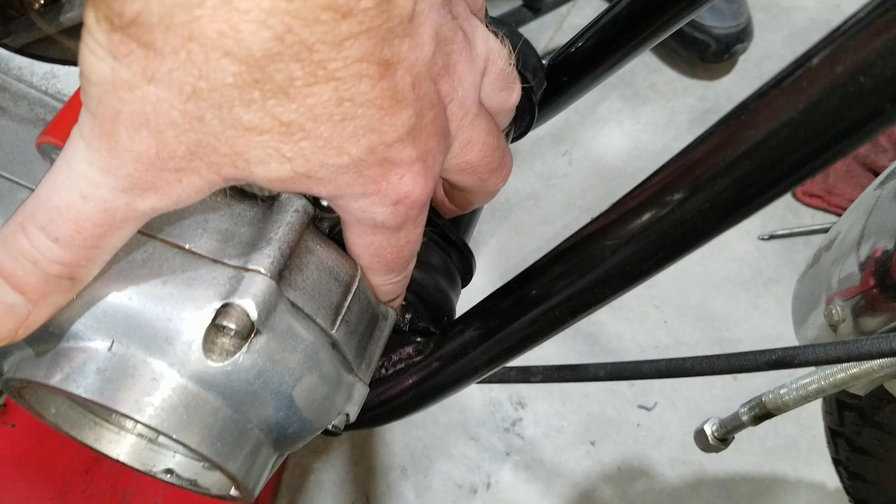Alright, so I just got done setting this down in here. First thing we did was we cradled it into the front motor mount guides, the little parts that are on the frame right there, and saddled the front. And then we installed this first bolt here into the top of the cradle, into the top of the rear motor mount part.

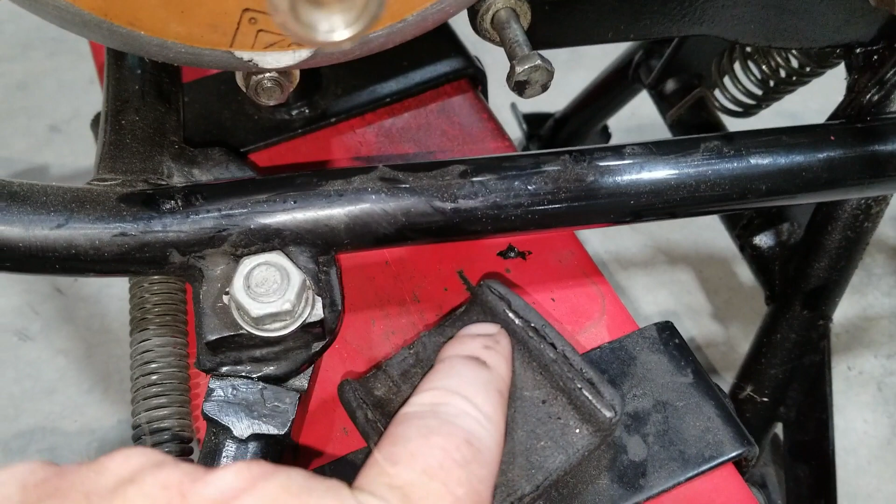So the next step, which we're at right now, is we're putting the bottom bolt in here. To do so, we have it on the center stand, and we're using this little lift vise thing here, and we raised up the motor so it clears the frame here. Otherwise, the head won't clear it. So you have to get it up at least the width of that head right there, and then you can put it in. Basically, we had to raise it an inch. So that's about where we're at.

So now, after we get that all the way in, which we're doing right now, then we'll drop it, like you said, and then we'll line this one up and put the front one in. Starting to lower this lift here. Wait a minute, I gotta take the center stand off. Yeah, because otherwise it won't do nothing. There you go.

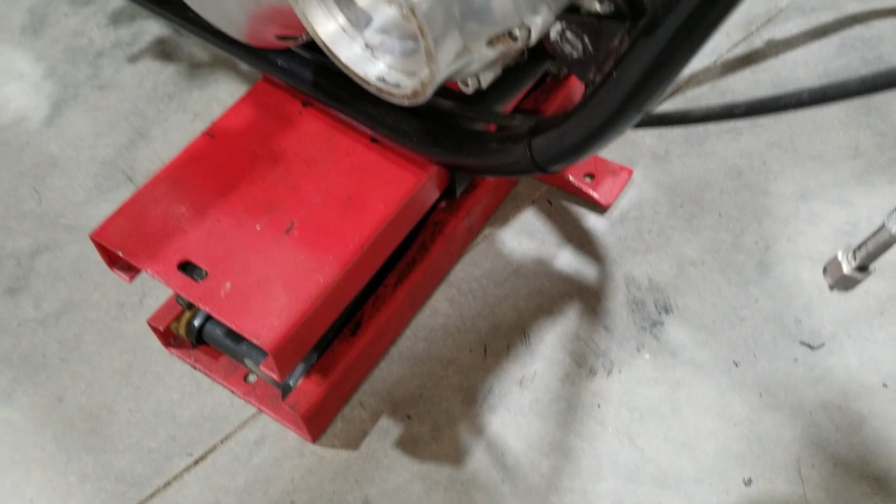You get the alignment pin in there, then I'll be ready to put the bolt in. The bolt comes in from this side. Yep, go ahead. Okay. Alright, so I mentioned before in part one when we were taking this engine out, we talked about the adjustable front motor mount. Unlike the original one, which used shims to get the right clearance, this actually has an adjuster here at the end.

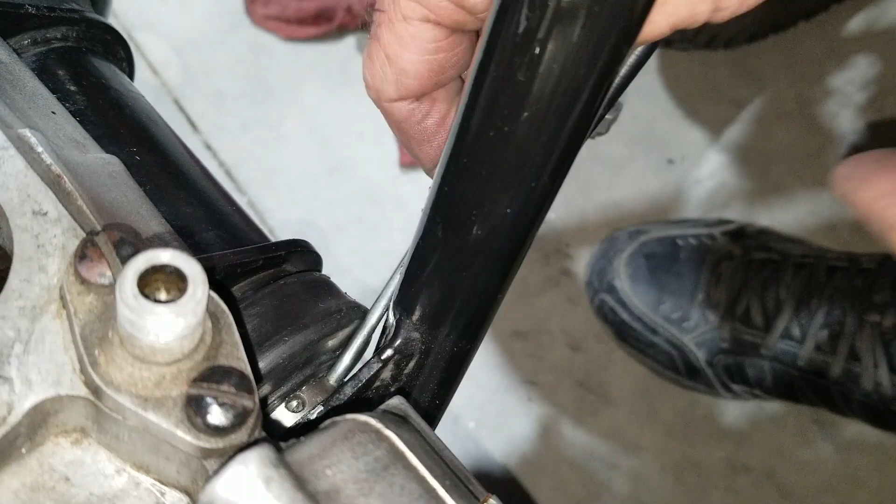And so we use this bar, a special tool here. And we want to get in one of them holes there. I can see. Okay. Now to adjust it, I gotta see. I can't use your camera. We gotta go 1.5 holes. And then all we do is 1.5 holes from tight. From tight. Okay, I'll do it again.

Okay. See where the hole is? Yep. Now I'm going to run this hole up there. Dang it. Where it was. There's one. Now half a hole is in between here, so I'm going to bring it up to about here. The frame gets in the way. There. That's about 1.5 right there. Yep. From tight. Okay.

Then we torque it down to 30 foot-pounds on the bolt. We do the adjustment first, then we torque it. Yep. So with that being tightened a hole and a half from tight, when we torque this down, it should give us our 6 to 10 thousandths in clearance, or free play, right? Yep. Alright, so we're gonna go ahead and torque it down now.

We're torquing the top rear motor mount. This one was 25 foot-pounds. We should get there someday. Yeah, and we got to torque the head of the bolt because we can't get access to the nut from this side. So here we go. Next one's a different wrench. So can you get to the other one? With a long extension I can get to the nut on this one, right through there.

All right, so we got to torque the front motor mount here to the motor. And we just got done doing the back one. There we are. Oops, let me get back on it. You want to check it. Okay. And then the bottom one. Got it? Yep. You can't get on it with the box end. Maybe this one I can. Surely not the top one. There we go. Yeah, I'm on the bottom with the box end.

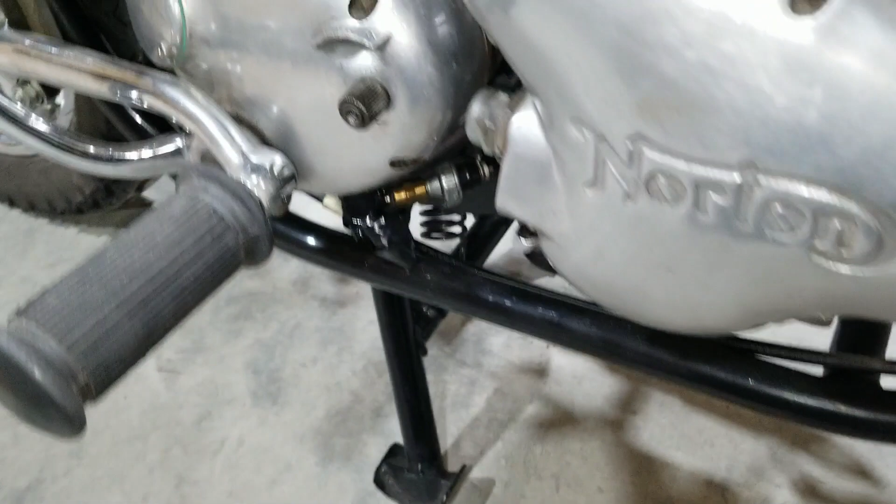You want to check that one? I can. Yeah, you check the other one. So there we go. Yeah, so the other two we tightened up was this one through here. I ran it through with this side and tightened it down, 25 foot-pounds, and then the bottom one down here. Same thing. There we go. We're ready for the next couple steps here.

Alright, so for the next step, we're going to install the primary side so we can lock the engine when we go to put the top end all on. Then we're going to run the oil lines and stuff, and then pretty much almost done. I mean, it's going to go kind of together quick, hopefully, here.

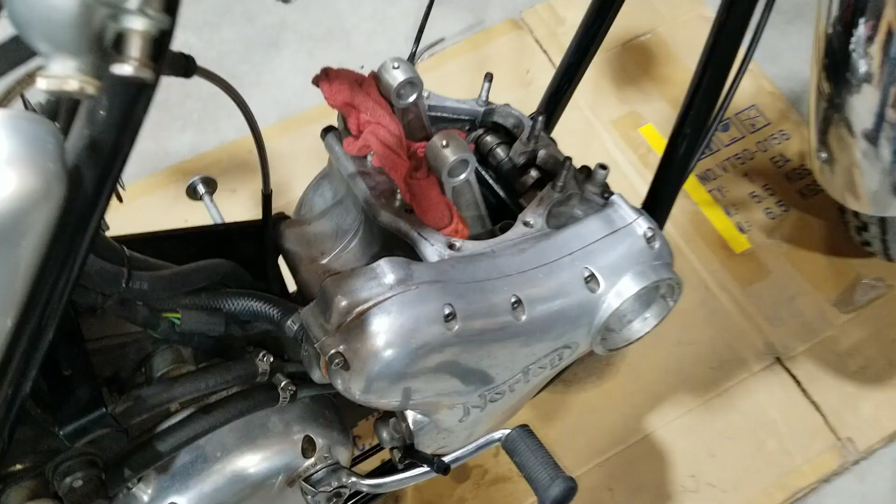Alright, so we got the oil lines hooked up here just now, and then we also put a little banjo on here on the oil feed. We're going to work on priming the crank assembly. We don't want that thing to be empty.

Okay, so you turn your crank to where the cheeks are, like there's a spot here, but that's what I go by. It's at 90 degrees because the holes that are drilled through there for oiling are at, when the crank's at 90 degrees, the journals are at 90 degrees, and these are at 90 degrees to that, so straight up. In theory, right now, through that little hole, I could probably slide a small wire right into the crank on each one.

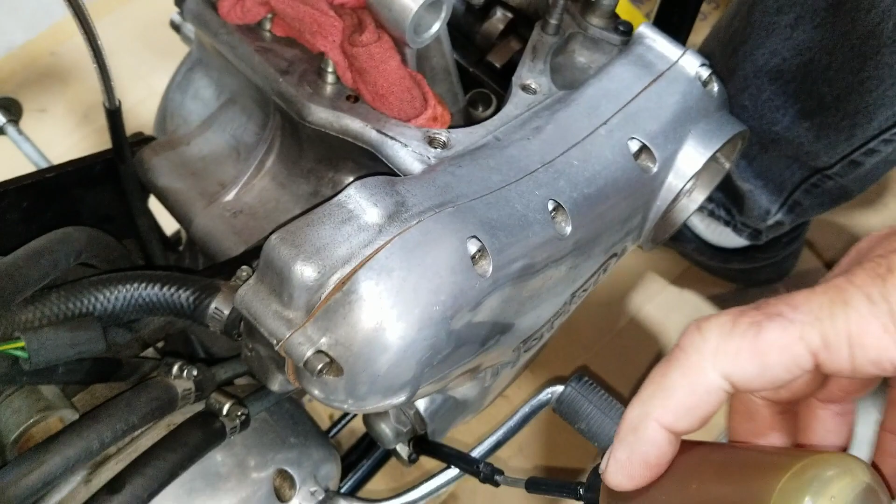So what'll happen then is I'll take this oil bottle here, which I got clean oil in. I'll put this in here, and now I will start to squeeze oil down through them. Eventually what we're going to see is it'll start to bubble and oil will start coming out. Now we put oil in it already before we put the timing cover on it. There, did you see a bubble? It's pushing air out right now.

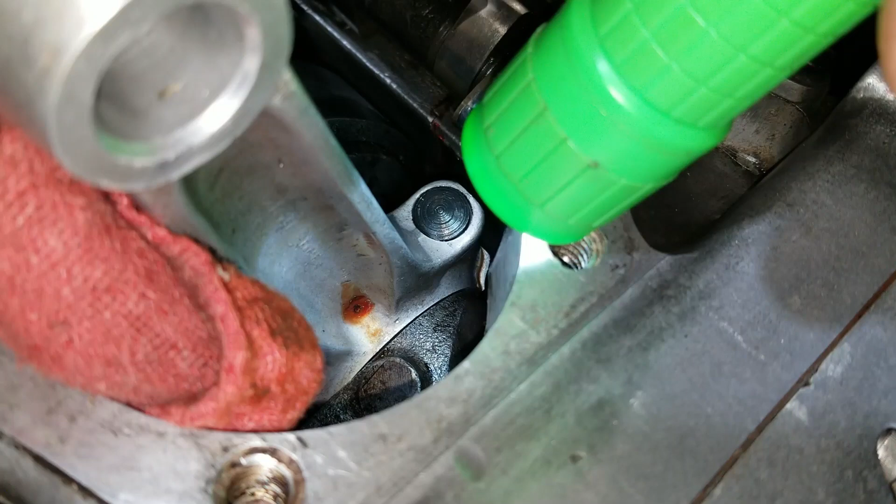And I'll keep doing this until oil just actually runs out of both sides. All I'm doing is putting pressure on the oil bottle right now, and it's slowly expelling the air. It's got a long travel it's got to take from where I'm at to here. But eventually it's going to get full.

To fill it, it holds somewhere around 4 ounces of oil. The crank does. So you want it full, or thereabouts. Or at least I want to start with it full. Yeah, we don't want it dry. It might drain out if we turn the crank to the bottom or something like that later.

Yeah, so we'll finish this up right here until it starts pouring out. There's some more bubbles. It's pretty much almost there. See the bubbles? Can you see them? Yeah, I can see them on the screen here. Yeah, anyway, that's the whole purpose of what we're doing right now. Just priming it so it's not a dry start.

Yep. I'm on the left side of the bike now. I'm going to check to see if there's any coming out. You go ahead and... Yeah, I am squeezing. Yeah, you are. I can only squeeze so much at a time. I can't pump it in. Right.

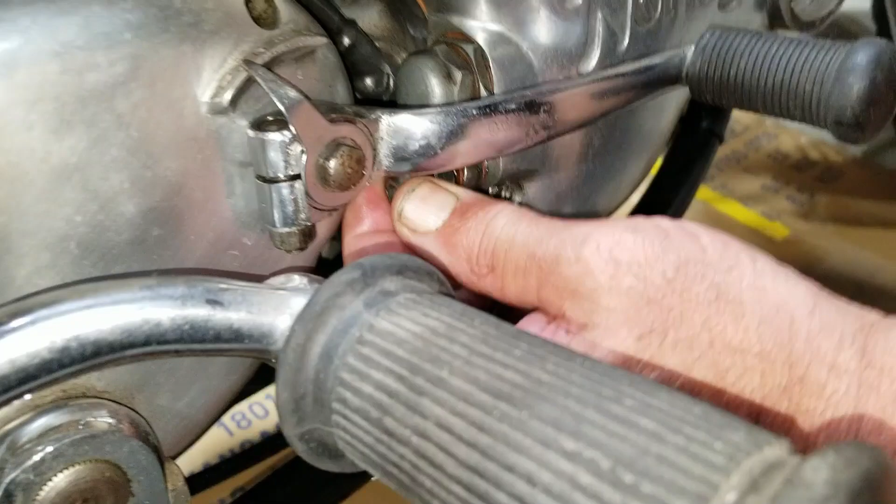Alright, now we took off our little improvised feed tube thing. And then we're putting on the actual line and pressure switch and stuff there. Yeah, we run an oil pressure gauge with a sender unit. Come on now. There it goes. Well, I guess that's not going to cooperate that much with me. I'll just turn it in a little bit more. Yeah, then we'll tighten up when we're ready. Okay. It's going to get pretty boring.

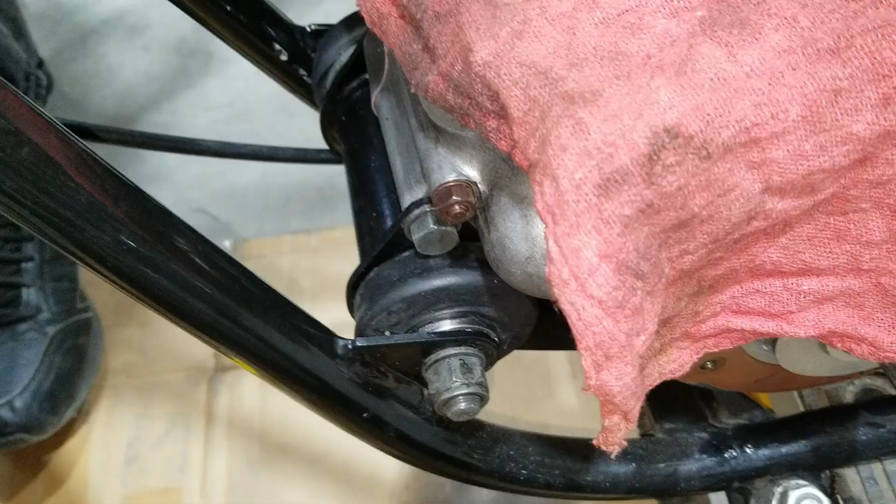Alright, so we're getting ready to put the primary together, but we're going to revisit the front motor mount. This is actually an adjustable front motor mount like we said before, but this is actually a Mark III item, and we just put it on this Mark II. It's a better setup than the standard shims and all that stuff, like the Mark II would have had originally, so that's why we went with the Mark III style front motor mount.

So this is what one looks like. It's buried there and you can't see it very well, but here's what the adjusters look like on the side, and so on. So anyway, why I'm talking about this is we need to go in there and actually use a feeler gauge and check it just to make sure that it's got the right clearance. So we're going to do that real quick here, and then we'll move on to doing the primary.

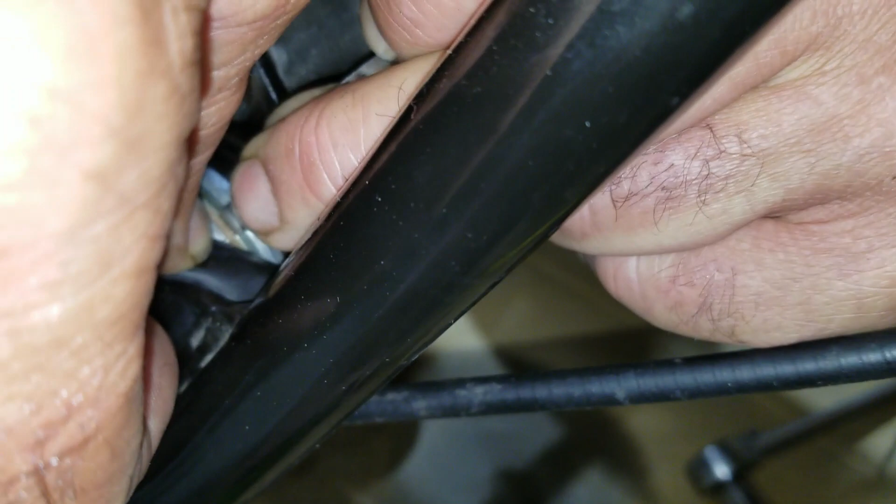Alright, so right now I'm kind of prying the motor away from the frame here with this rubber hammer, and that's going to relieve any sort of pressure on there. And I can't get a 6 in there. So we're going to have to move this. We're going to have to loosen it a little bit.

If you get it too loose, the bike will feel like it's wobbly, because the rear wheel and the motor move, and it'll feel like it's loose or something. It's a strange feeling. Okay. Let's see where I'm at here. There it is.

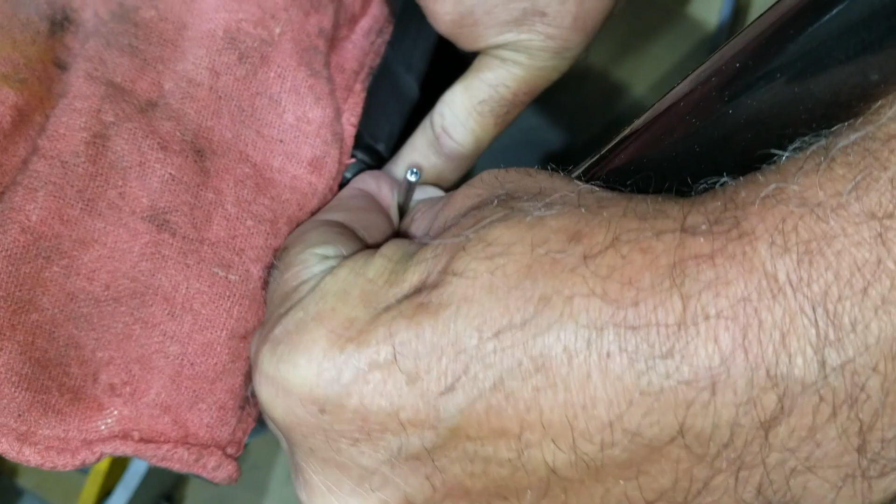Okay. Alright, you got it moved a little bit? Yeah, now we're going to have to snug it up. Okay. Because you got to test it after it's tight. Okay. Hold on. Yeah, there we go. Okay. Now we're going to test it again.

I could barely get a 6 to start. We got to go more. Okay. All right, so we got it to where an 8 fits in between those two pieces right there. See that? So that's where we want it to be. Now we're ready to torque this back down. It should be good.

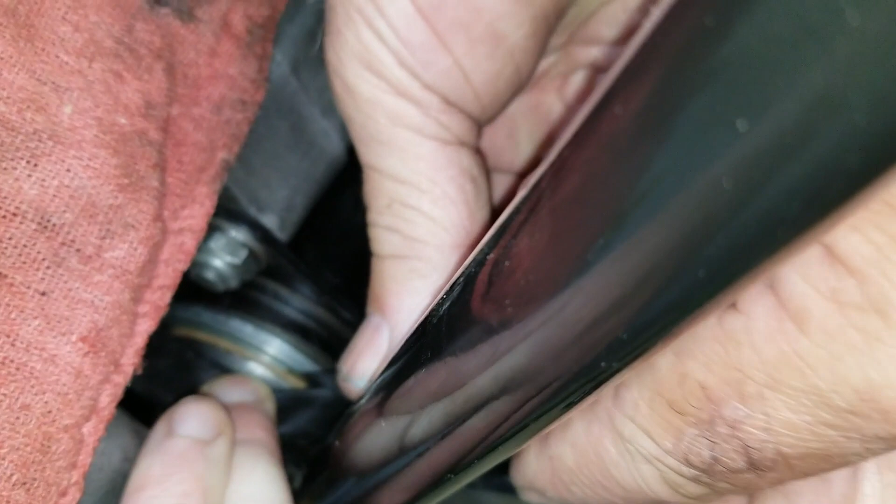There we go. We got it torqued, and now we're just going to double check it real quick. Yeah, it fits. All right. One washer. All right. So while working on this primary here, you want to make sure that you have it aligned properly. It needs to be flush with the motor.

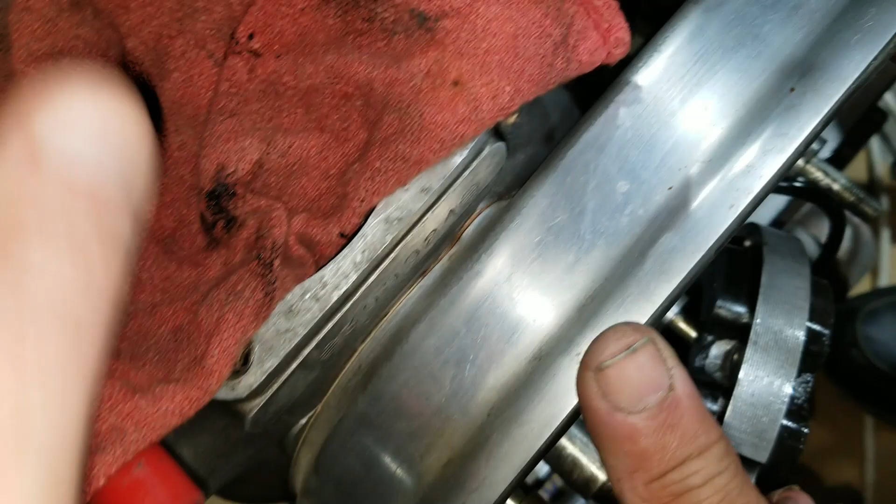When the motor is all tight and in the frame and on the cradle, the transmission is tight on the cradle. We want this solid tight. And these washers back here should not move. There's a set of washers right down there. Okay, let me see that. Yeah. So that's what gives you your position on it. Helps you achieve this being flat with the motor.

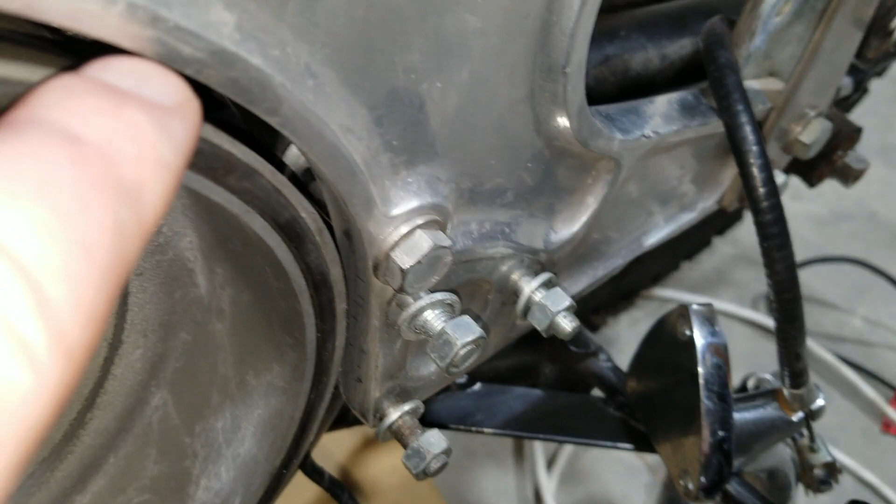Because you don't want this primary cover to be cockeyed or loose or something. Because this whole unit, the motor, transmission, rear wheel, it's all one unit, and it's isolastic, and it moves around. And the other important thing is to make sure you have a gap here, going all the way around, because it wiggles, and you don't want this rubbing on anything. So we're good. It's pretty much just the way it was when we took it apart.

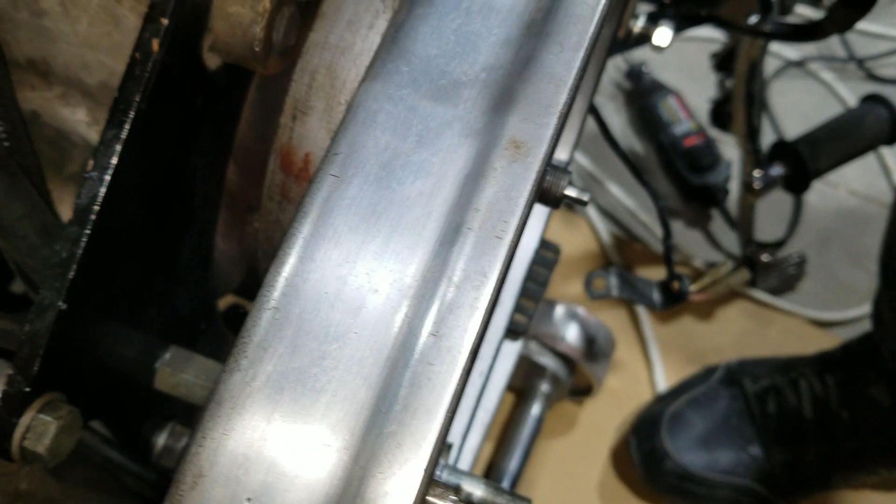We did add a washer though down in there. Yeah, we added one washer about this thick. Because the other thing is there's the swing arm. You can hit the primary back there. You can't see it from here, I don't think so anyway. All right, so here's the swing arm, and this is the part that can rub on the inside of the primary.

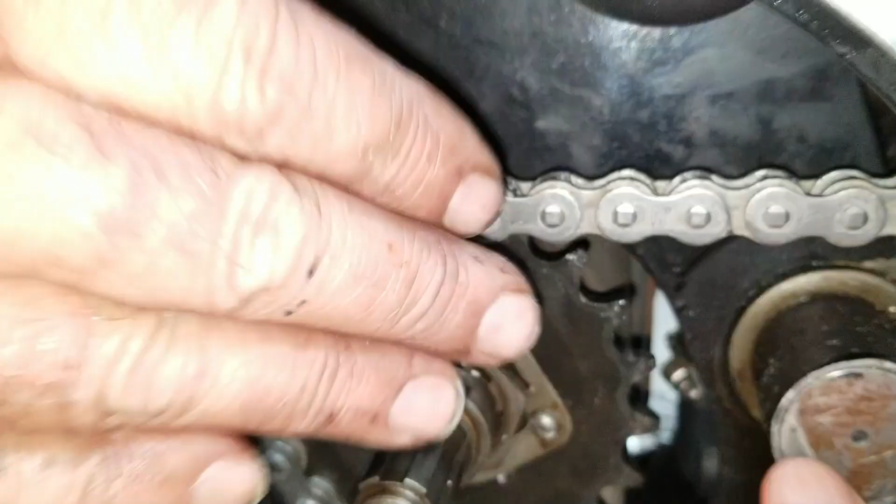And maybe at one time this actually was, because there's kind of like a wear spot here. And here. Oh yeah, and the primary too. Right there. So I don't think that's where we got our noise from, but anyway. That's also why we added a washer here. One little thin washer can make a big difference if it's not lined up right. Yep, that's it right there. Extra washer. Now we're just going to put some sealant on this just to help seal it, I guess.

Alright, so we replaced the gasket just for good measure, and we used 518 to adhere it to the primary. Right now I'm going to just pop it on there. There it goes. Alright, cool. Then we're going to put the special bolts and lock tab pieces in there.

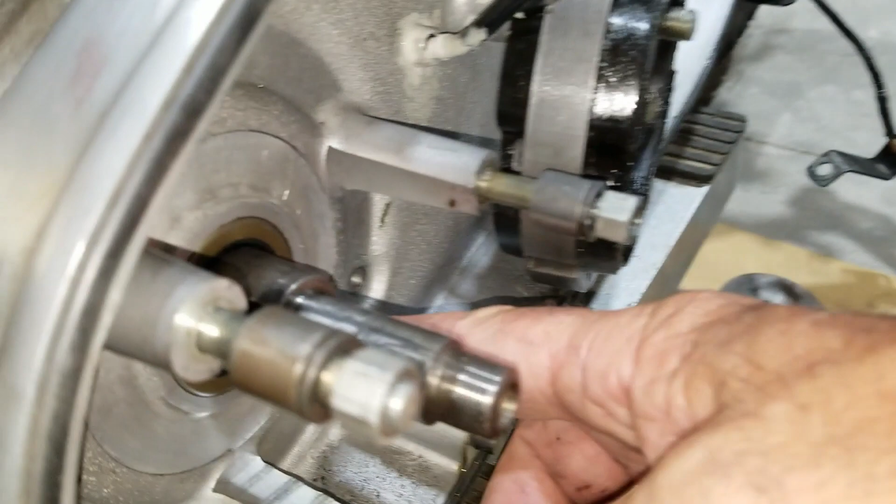Okay, there's two little bumps here. See that one? Yep. And this one, and then there's the hole. Them two little bumps got to be on this. Then you bend that over the head. So I gotta put this down in here. Start the bolt. Not worried about it yet. It's kind of falling in place anyway. Yeah, it kind of does. But it could be 180 off if you're not careful.

Yeah, we did use a little bit of sealant on there because those holes are through to the motor. You can see it's in there. There we go. We'll put the rest of them in. There's two other ones right there, and at the top, of course. And we'll tighten them down to 100 inch-pounds. See that in a minute here. Okay.

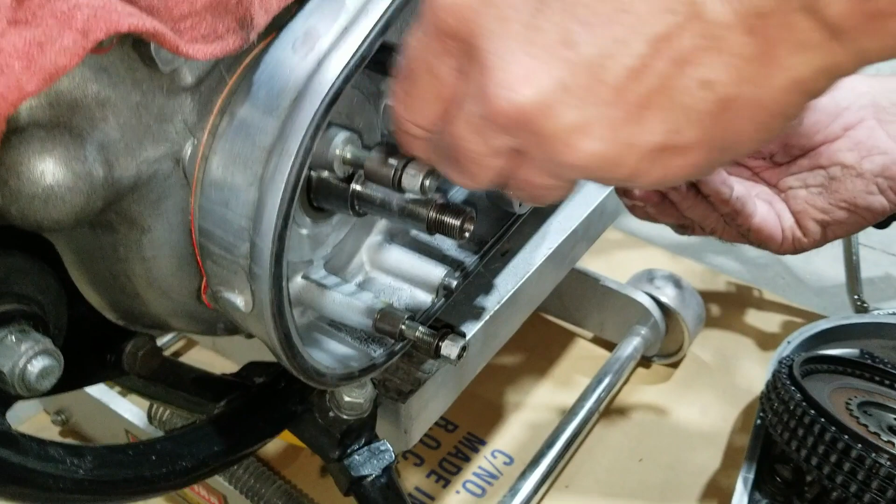Work my way around. That way it goes on evenly. Yeah. For any weird reason it wouldn't. And then, yeah, making sure that I can just barely turn that washer, so we're just looking perfect. Cool.

That means when you tighten this up, it ain't gonna push that way in. Yeah, then cause a weird non-straightness, and then eventually break or crack down the road because of the stress that's on something, right? Yep.

Here we go. Now we're going to bend over the tabs. You ready? Yeah, we're working on folding them over a little bit. And you can get in here with pliers and bend them right up nice. And it locks it. Just got to get behind it and start it to bow out. There we go. They're on.

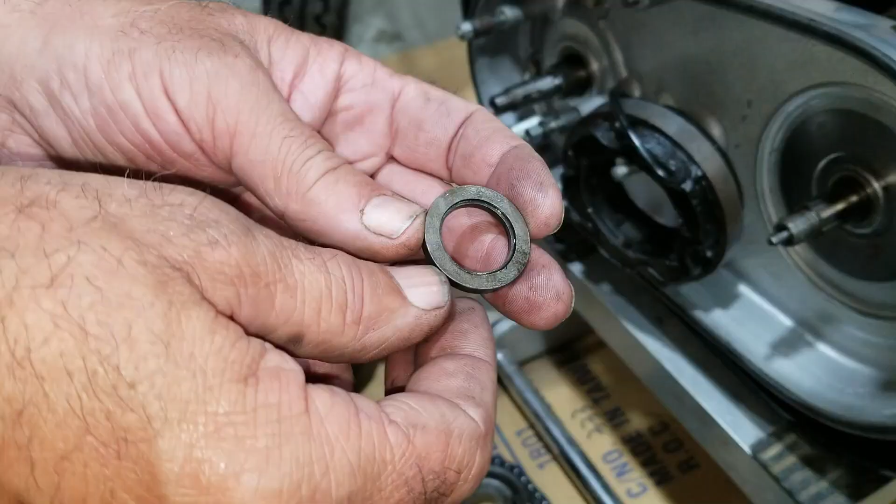All right, we're getting ready to put the components back together in this primary. So, okay, there's a thick washer with a groove, and the groove is to make sure that this little snap ring that's on there doesn't pop off. So that's got to go over top of it like that.

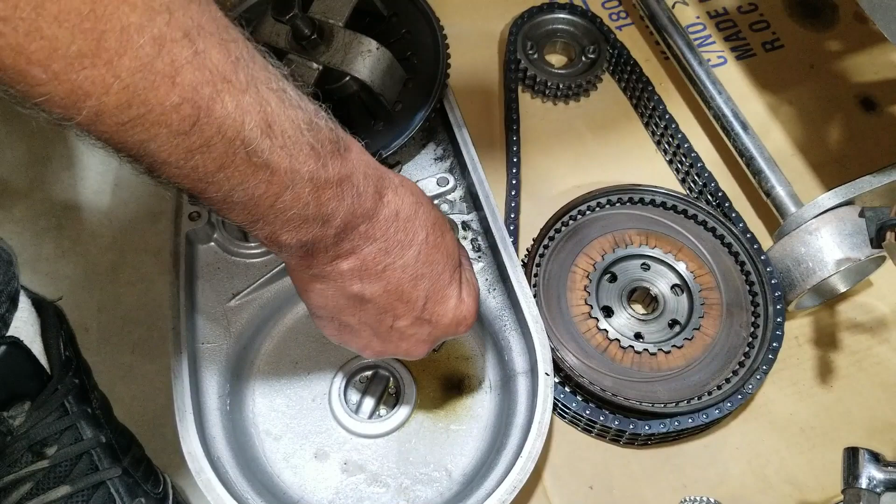Now there's also some shims that go with that. So this one must have had 3 shims. Or 1 shim. I don't think this one goes to that. No, this goes up here. All right. That's the lock washer. It goes to there.

The big key goes on in the back part, of course, only when it fits in. That holds the front sprocket on, yeah, or engages the front sprocket. Okay, so got to put this on as a set.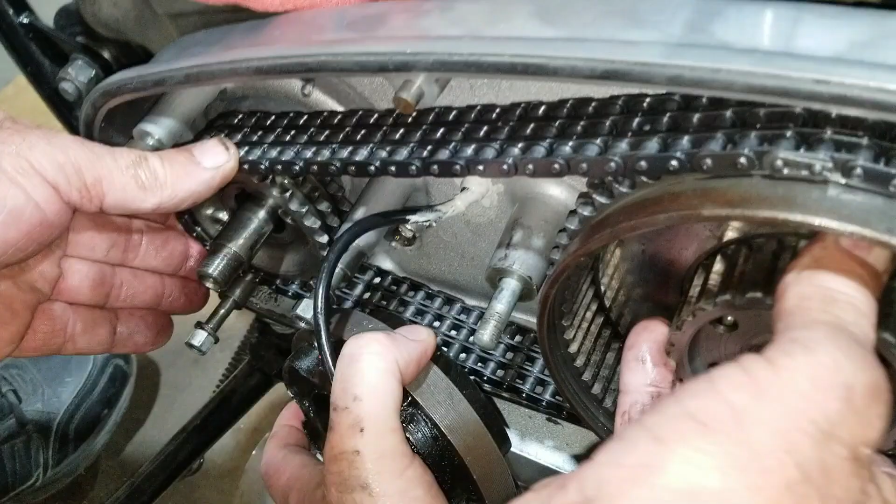Oh, wait a minute. It's not even on it. Yeah, that'll help. That'll help a little bit. Yeah, that should help a lot. I thought it felt kind of. There it is. Okay. Oh, there we go. Put the damn thing in gear, huh? I didn't think that transmission was that tight.

You gotta go forward more, no? Yeah, well, for some reason, it feels like it's tight. We got it pushed on there. Again, it's a little bit tight here. We're gonna have to adjust the transmission a little bit. We're supposed to have 3/8 of free play. It's not that, obviously, right now. So 3/8 to half inch, something like that. So we'll work on going the rest of the way here, and then we'll work on adjusting the transmission.

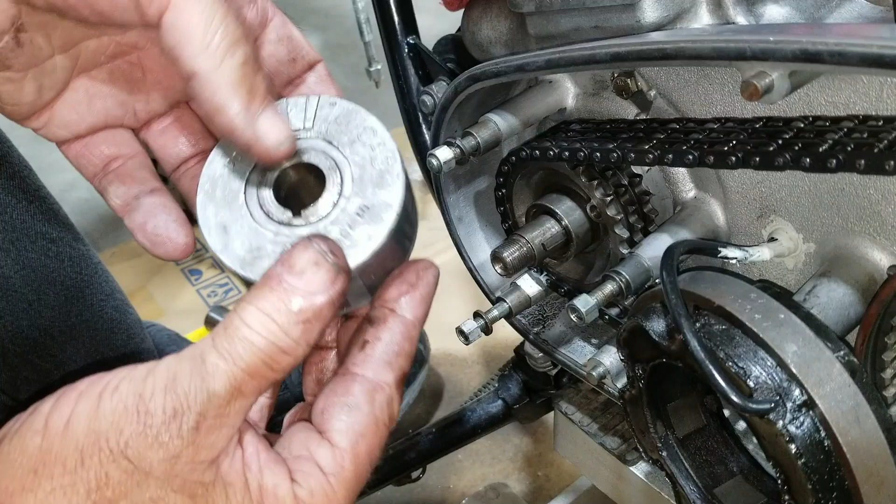That's cupped because of how the magnet goes in there. Oh. So you're saying cupped? Oh yeah, it's counterbored or whatever. The spacer, okay. Shims go to the rear. Like that. That's so that you can put this in here like this. If it was flat, it wouldn't go in all the way. Like that.

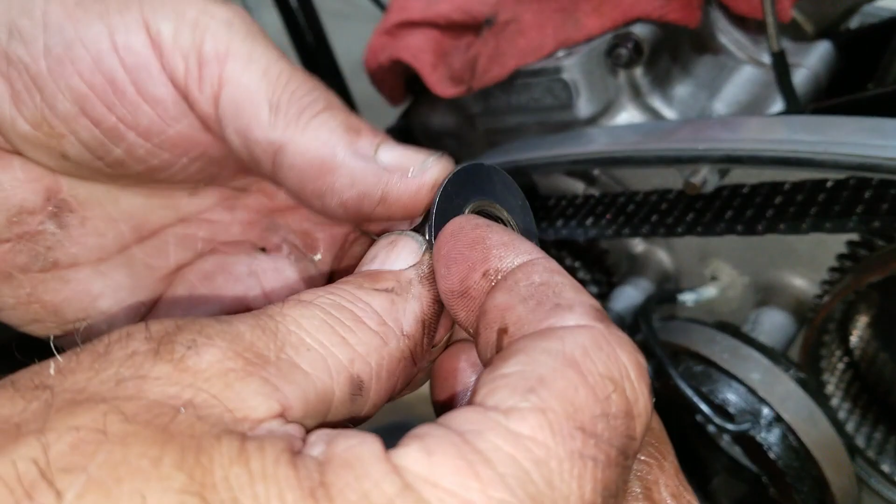And we have another shim or washer, and then the bolt that goes on that holds it all together. Yep. Oh yeah, lock washer too. I use a bevel washer. It's not a stock part. It's something that you add to it to help hold these so that they don't vibrate. They don't come loose.

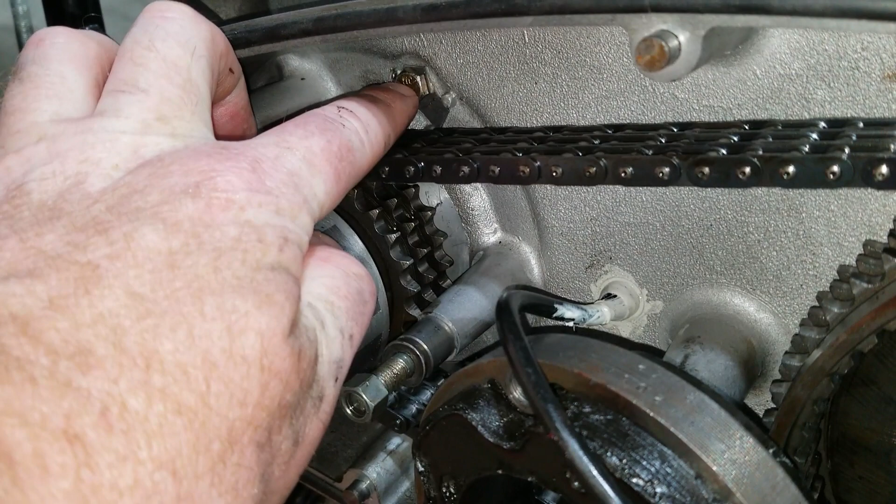There we go. It's not tight yet. No, we're gonna torque it down. You gotta torque it 80. All right, so the book said this was 80 foot-pounds of torque to torque this nut down to the sprocket here and the shaft, and then these bolts back here that we already did didn't really say anything in the book, so we ended up going to like 100 inch-pounds, and then we bumped it up to 120.

And then, of course, you saw us bend it over, but anyways, it didn't say. It just said fasten them securely, or tighten them fully. Yeah, I come across that a lot in the books. It's kind of too bad because when they built this bike, of course they had torque wrenches, decent ones. They could at least have given us a spec. But anyway, we use our best judgment on some of this stuff because it's aluminum.

There we go. There we are. We're installing the stator part of the charging system. Yeah, there's a spacer that goes behind here. Make sure that's in the back. And then a washer and a nut to secure it down in 3 places.

Does this have a torque spec too? Or is it just securely? It does. Yeah. I'll go look it up in the book. I think it's 30, but I'll look. So this is 15 foot-pounds. So we're gonna probably use the inch-pound torque wrench. It wasn't 30 like we thought offhand, but there's a 1/4 inch bolt, I guess, or stud. So 5/16. Oh, is it 5/16? Yeah. Oh, okay. But it's a small diameter, so you can get a socket in there. Okay. So we're gonna do some inch-pounds on this one.

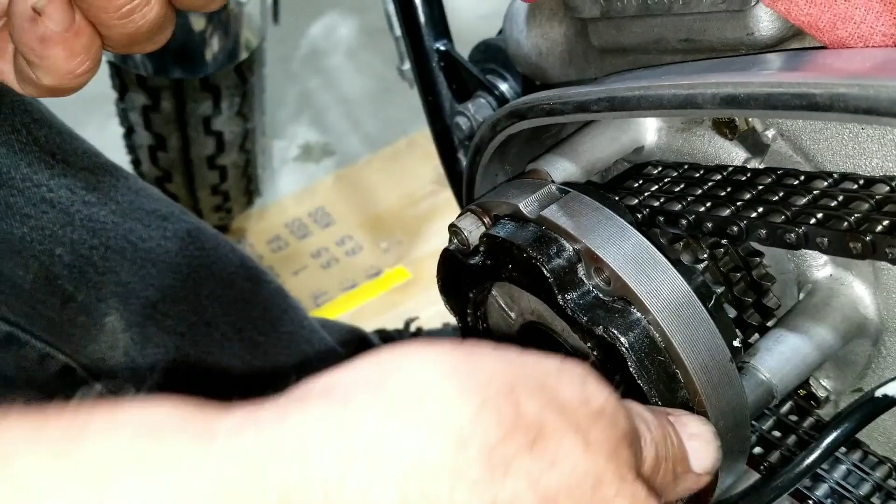Before torquing it down, we gotta check for clearance between the stator and the rotor. And we gotta have, what was it? 8 to 10 thousandths of free play between the two, the gap. There we go. I got it converted over to inch-pounds, so we're going 15 times 12, so that's 180 inch-pounds. Just a minute. I gotta check it when you tighten it up a little bit. I gotta set the play. And I might have to tap it because it's loose over here, and I think it's gonna be tight over here.

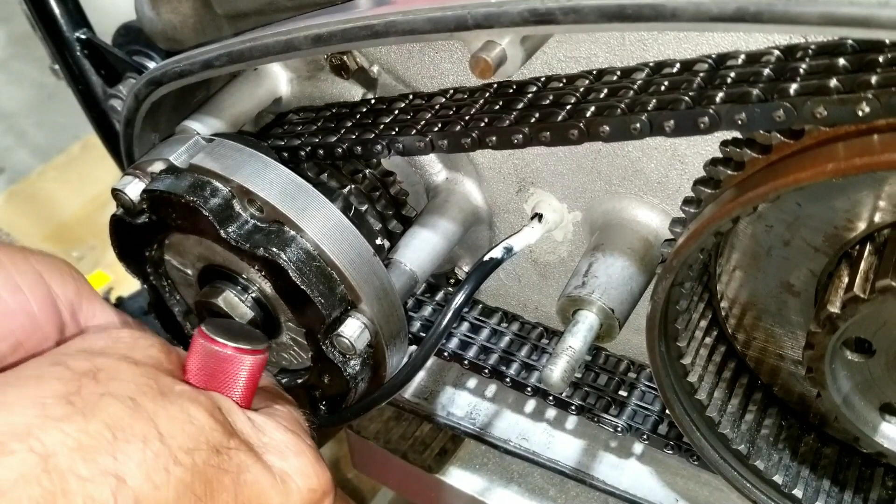Kind of tricky to do this because the dang feeler gauge sticks on all the magnets when you go around it. I need a little bit more. Okay. There we go. Pushed it in, geez. Better check it again. Well, after I tighten, yeah. It might move, you know. Yeah, it might. It's that magnet or something. It goes. It's clear. It's clear.

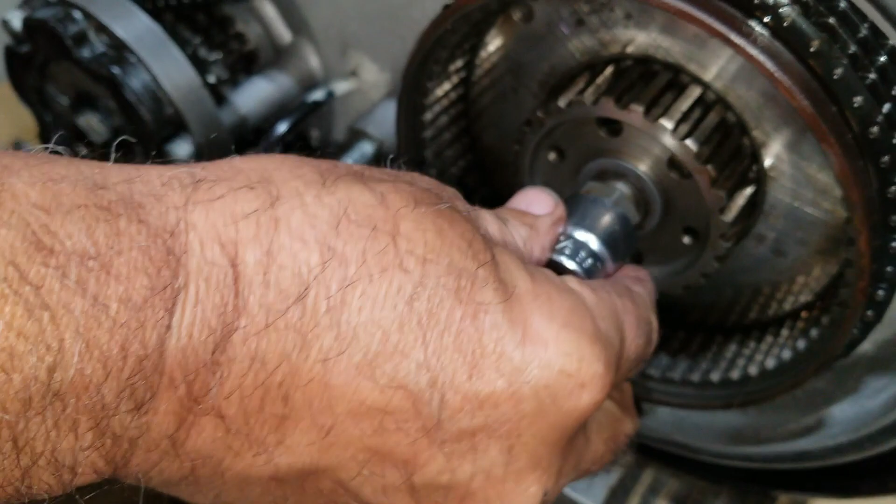Alright, so next we're going to be putting the clutch group together. So we got a big nut right here. The book talks about torquing this nut down to 70 foot-pounds. But that's wrong. If you do that, you break that clip in the back. Remember, you said that in the first video. It's been superseded to 40 to 45. So later they changed it. But most of your manuals, like Chilton's and Haynes, they all say 70 foot-pounds. Well, I'm gonna break it. So 45 on there.

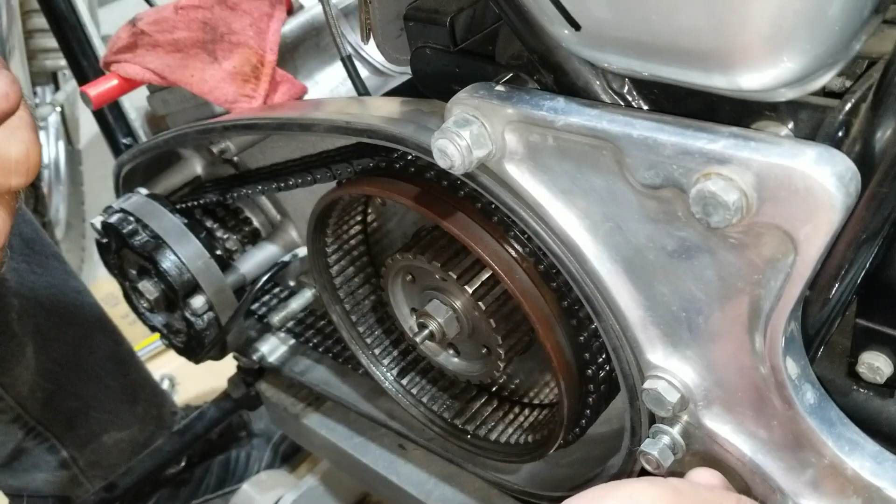Alright, so we cleaned it up with brake clean first, and then we applied some blue Loctite to it. Now we're ready to torque it down to 45 foot-pounds. To hold the rear wheel, or put it in gear. We're gonna lock it with the brake. Oh, easy enough. It's on this side, because it's later. When we tried doing the Tiger, it was on the other side and it was kind of a pain in the butt. All you gotta do is just stand on it right here. Yep, I got it. As hard as you can. There we are.

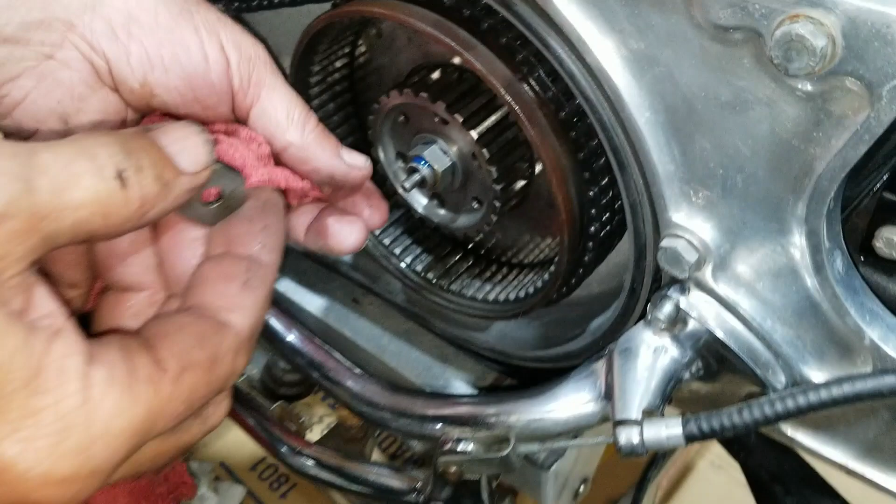Now we're gonna put a little bit more Loctite on it. Just a little. We talked about this in the first video, but we'll talk about it again. This is a special nut that actually has a seal in it. It has an O-ring in it. And that keeps the transmission fluid from migrating into your clutch discs. Where did you say you can get one of them? Dyno Dave is the one who made these, and several of your better Norton parts suppliers will have those. Okay.

There we go. I'll move on to putting the clutch discs and stuff in once he gets this torqued down. That's a special size, a little bit smaller. Here's this one. Oh, good. What torque spec do you do that at? Just snug it good. It's only holding on by 2 threads. You just don't want it to fall off. And your Loctite is going to stop any fluid. So no, we're not going to go 45. Push hard. Yep.

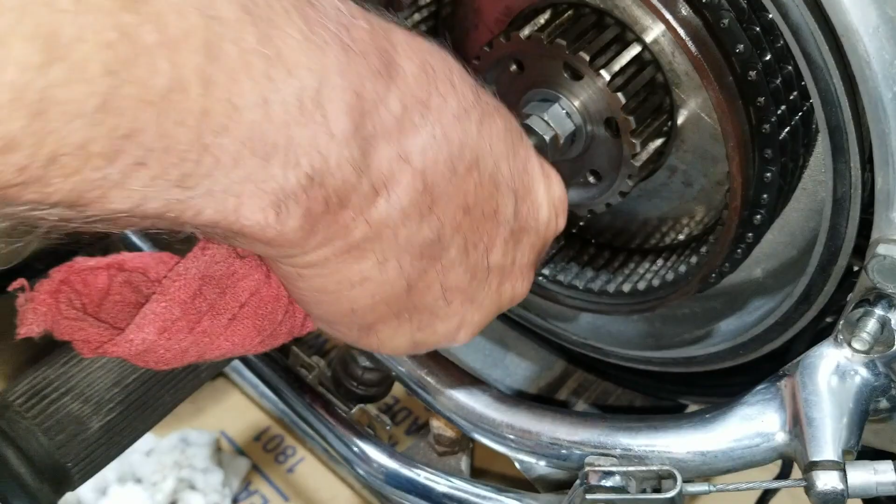I like to get a lot of our British parts from a dealership, not really local, kind of a ways away, that sells vintage parts around here in Iowa. Down at Baxter Cycle in Marne. But otherwise, you could look around on the internet, and you should be able to find that special seal somewhere.

Don't you think? Alright, so next up we'll be adjusting the chain tension here. We're going to loosen up the transmission and get that to where it needs to be. Then we'll put the clutch discs and assembly all together.

So we're looking up in the book right now for double checking the chain tension here for the primary. We've come to a conclusion on something. When we put the motor in here, these bolts went in very nice and tight. There's no adjustment here, no slop, to where you can move the motor around and have it all line up differently. Same with the front motor mount. So when we put the motor back in, it went back to the spec from before we did the lower end bearings.

So what we've come up with is the reason why this chain's tight is because those bearings that we replaced were actually kind of going out. We could finally kind of feel some free play in the bearings when we were checking it with the races and stuff. So now this is tight, going back together the same way. And our rear chain, we believe, has the right slack or slap or free play, whatever you want to call it.

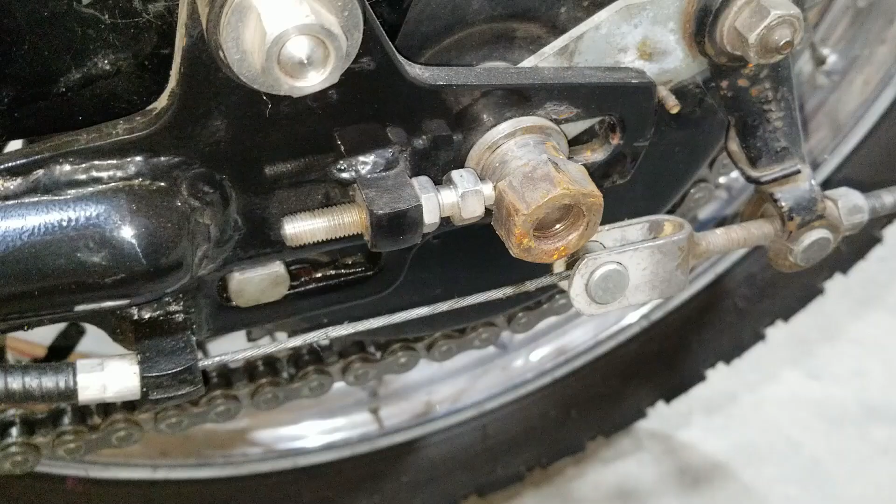Alright, so we started off by backing off the adjuster 4 flats of the bolt here, which gives us free play for the chain, which will let everything come forward. Next we're going to loosen the transmission so we can move it. Then we can start with this chain. We tighten this chain, get it set, then we get the transmission set where we want it, and then we do the final drivetrain after that. So I'm going to go to that side, and we're going to start working on adjusting the transmission.

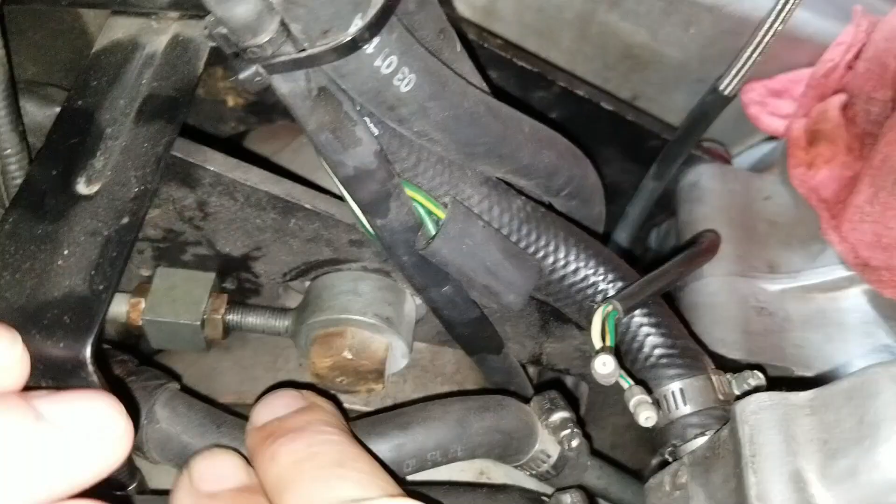Alright, so this is the top adjuster for the transmission on the top of the transmission here. There's a little bit of play in this, so we have to loosen this up a little bit, and we'll leave this open back here, and then we'll start pushing on this one to push the transmission forward just a little bit, so we have the free play we're looking for in the primary. Then tighten it all back up.

And this should be really tight. Yeah, it looks like it is. There we go. Oops. It's really hard to get into that adjuster. Well, sometimes you have to loosen this one first. So you can loosen this one. It's hard to get back in there because there's a spring on this so that the line doesn't collapse. There it goes. I'm helping it along there.

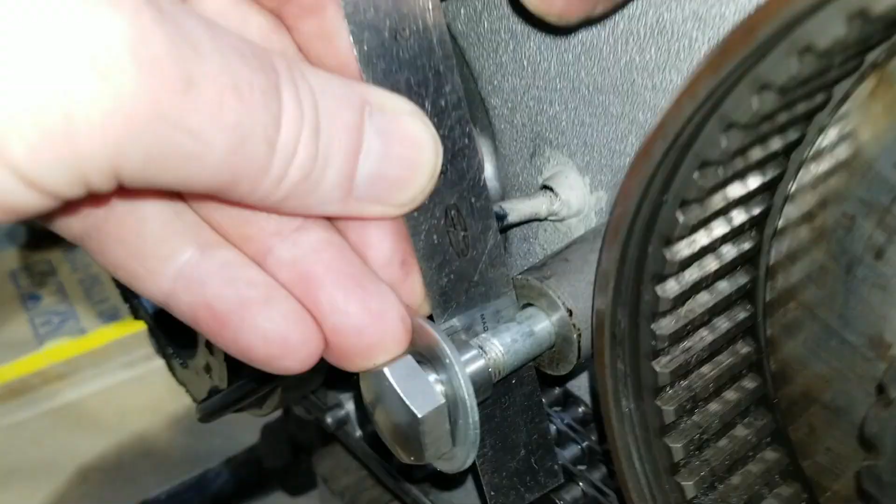All right, I'll get a ruler real quick. All right, so I got the ruler laying there. We're measuring off the two. Let's see if I can get it lined up again. You can set it inside of here, to where you see it better. All right, there we go. It's pretty close. Yeah, I think it is. All right, I think we're going to be good there.

The other thing, before I couldn't turn this freely. What happens is if the chain is too tight, it won't shift gears and you won't be able to find neutral real easy. Yeah, and it puts bind on the transmission shaft, because this is pulling so hard, it pushes on the bearing. See, this is hooked to the main shaft, and there's a bearing in there. So now it's free, see? The problem with that is it caused the bearing to go bad prematurely. Yes, and the bushings in fourth gear.

So you got to have this play in here, and it doesn't hit anything. I can't force it to hit. See up there? Oh yeah, we're a long ways away. It's got to be free slack, 3/8 free slack. A lot of people think it's like, well, push down as hard as you can, pull up as hard as you can, and make it 3/8. Well, then we were already there, and it was too tight.

Yeah, it's got to be slack. Slack is important. So I think this is right where we want it to be. All right, cool. If anything, our chain is just about... Oh, the final drive chain. Yeah, we'll probably have to loosen it just a little bit more. All right, but we're gonna go there and tighten up the top transmission mount and make sure it didn't move on us.

Tighten this up. Yeah, you're gonna lock it with that one now, that way when we go to tighten up the big bolt there, it don't move. Yeah, exactly. Because this is already tight because we pulled it up. Yeah, it's got tension on it. Okay, get on there. There it goes. It's hard to get in with your clutch cable and everything's in the way, and then the battery box. Everything. Yeah, it's tight.

So now we're going to tighten the top transmission bolt and then we're going to check the bottom transmission bolt and tighten it too. There's a torque spec on this, so we will torque it. We got it pretty close right now, so it ain't going to move. So now we're going to go back and double check it here.

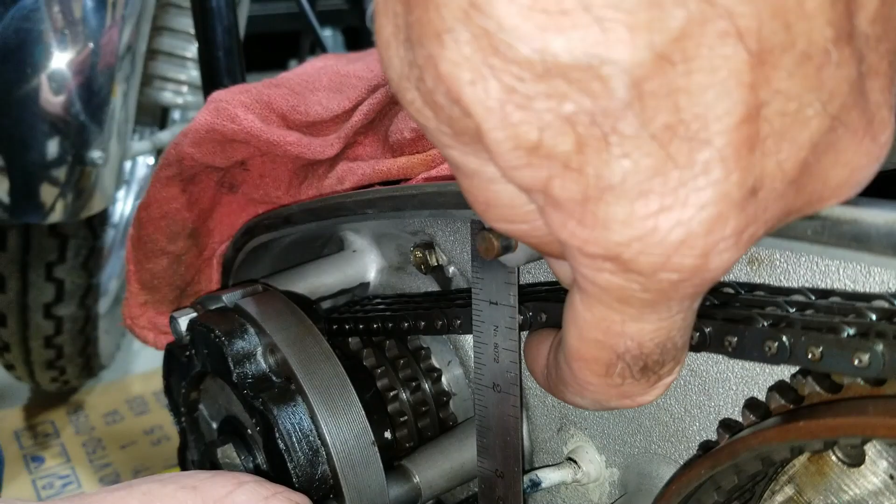I put it right next to a pin, if we can. Okay, there's another way of doing it. Middle, if we can. We want to be between these two as much as possible. Okay, look at there. Well, it can be right there. Okay, right there. And that's the slack, 3/8. I mean, I could force it to go higher. Each one of the bigger marks on the right side here is a 1/8. Yep, perfect. All right, cool.

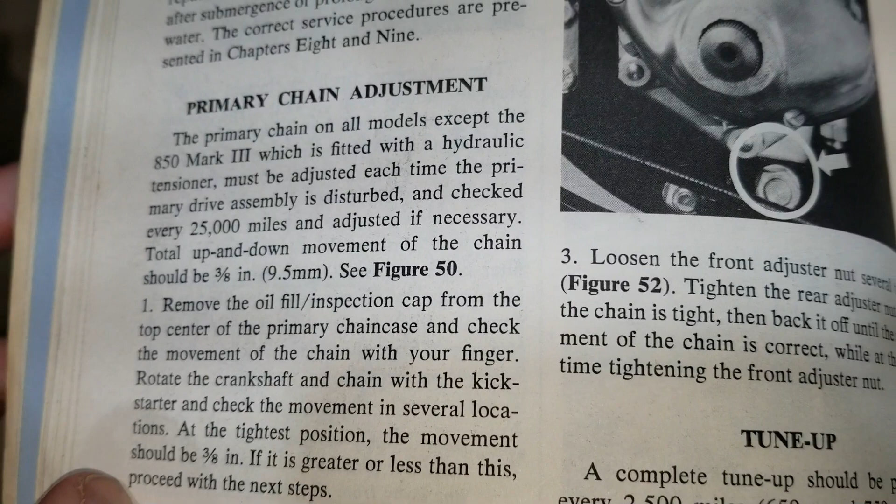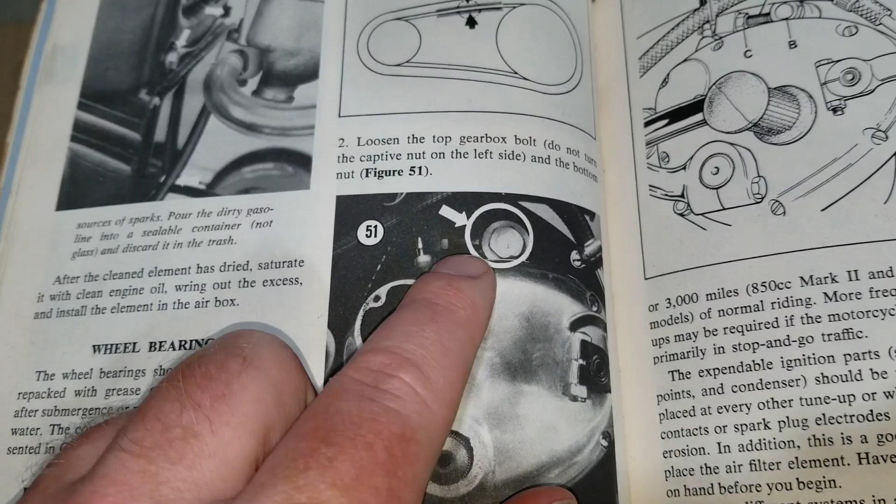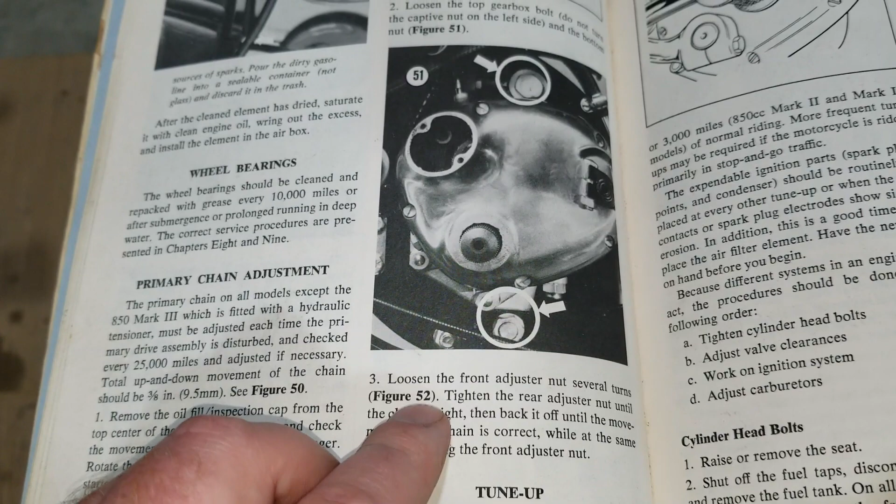Do not turn the captive nut on the left side. It's actually got a notch in it, and it sits into the cradle the transmission sits in. So if you move the left one, you'd end up damaging something. Key point: do not turn that nut on the left side. Then it talks about loosening an adjuster nut, which we've seen already. I really can't find the torque spec for that nut, so we're going to set it for like 50 foot-pounds. Is that what we decided? 60. That sounds about good. It's a big bolt anyway. So we'll end up doing 60 foot-pounds.

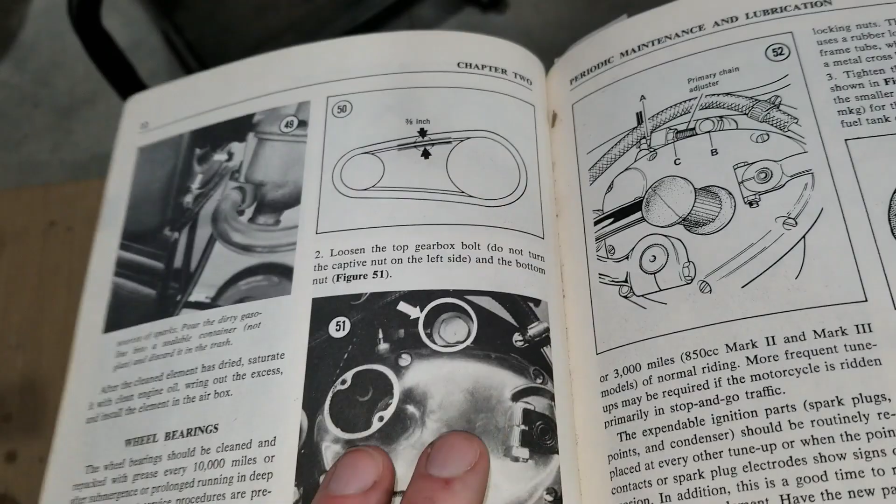So we're about to do our test here. We found the tightest part of the chain and did our adjustment on it. Now we're at our starting spot. We want to see what kind of slack we have, and we need 3/8 slack. So go ahead. 1, 2, 3. Looks like 3/8. Now we're at the bottom of the primary cover, starting from here, and remove the slack. 1, 2, 3/8 it moved. So I think we're good here.

And like we said before, we want this to be loose. It's free now, real free. See there? So it'd be easy to find neutral and put it in low gear without clunking and banging. If I push in, I can hit the case, but that ain't gonna be happening. Okay, here we are. We're going to torque this down. If we're not comfortable with 60, we might go a little bit higher, but we'll see what this feels like.

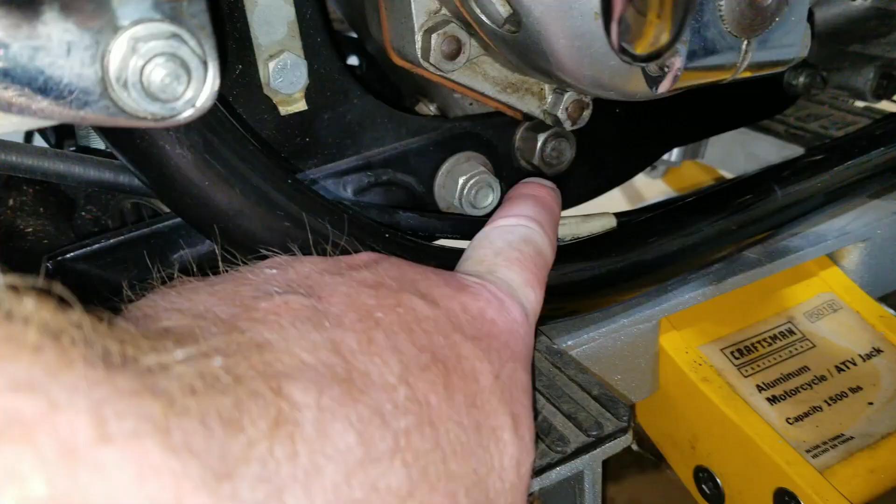You think you're okay with that? Felt pretty easy. 65, 70 then? It's a big bolt. Like 3/4? 5/8, 3/4? I mean, you tighten the front nut over there 70 foot-pounds, and we don't want this to move. Right. Yeah, 70 ain't much different. In fact, that front bolt, if I remember right, was 80 foot-pounds, but I think 70 is fine. Okay. We were just double checking this lower transmission mounting bolt here, and it's tight, so we're good. Like the book says, leave that one alone.

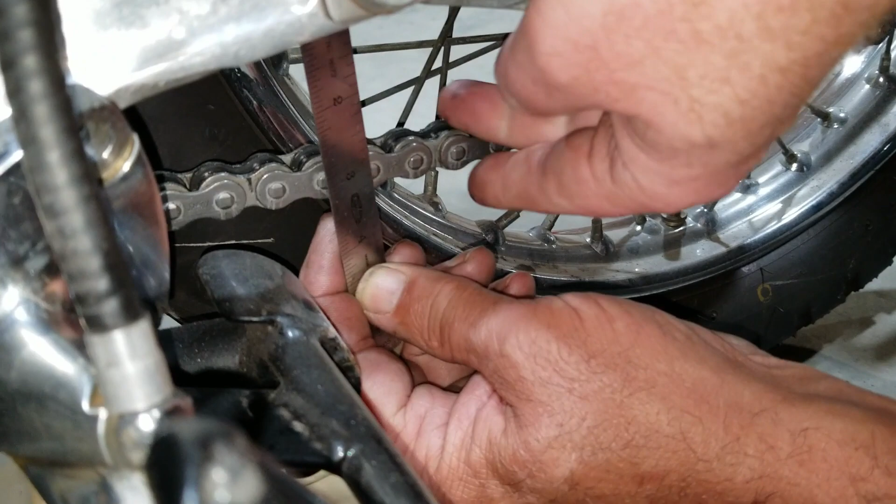While we're messing around with chains, we're going to work on this rear chain here. This is an X-ring chain, and we have to set our tension on this one too. So we're going to work on adjusting this right now. Move it up. Pull it up. Let it go. Push down a little. Okay. Hold it. Put it down. Okay, there's a quarter. Now go up. There. That's about 1 inch.

Okay, I think we're fine. All right, we'll just tighten up the adjusters then. No, we did tighten them. Oh, you did. We can always tighten the chain 1/4 of an inch sometime down the road if we hear the chain guard clanging. Okay. Yep.

All right. So we just got done tightening our axle nut here. When you do that, make sure you apply brake pressure so it centers the brake shoes into the center of the drum, just by pressing on the brake while you tighten those axle nuts down. So, not much to that.

So after the rear brake and rear chain tightening, we're ready to assemble the rest of the primary here and put the primary cover on, and then we'll move on to the top end, the motor. So we just started putting the plates in. I want to wipe each one down with some brake clean. That way they're nice and clean when they go in. Yep, dry. It's a brass clutch. Oil will get in there later.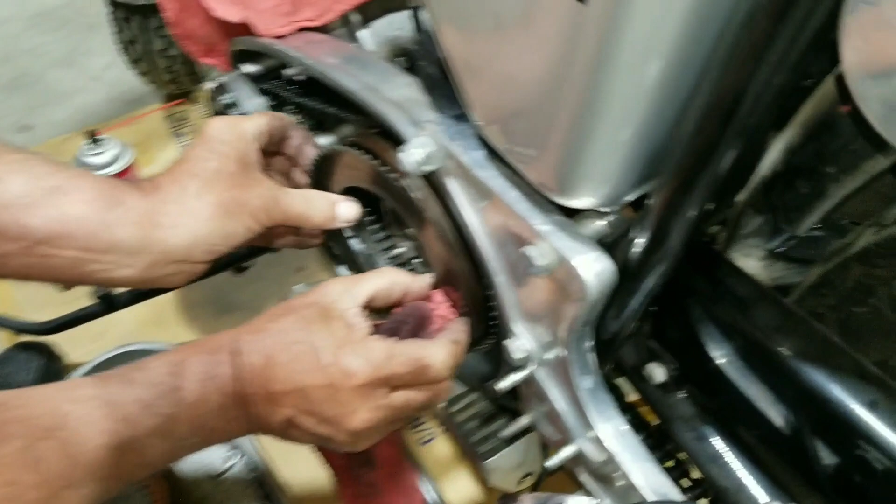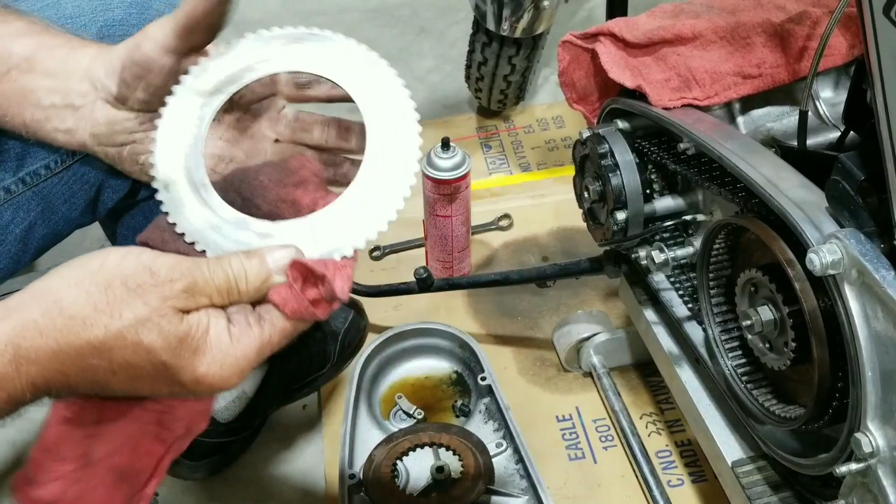Get rid of any sticky, gummy, dried up oil. By the time you get to the middle, they're pretty clean. Yeah, that one is a lot cleaner than the first one. You see the difference anyway. Yeah.

By the time you start getting to the outer side, it seems like both ends get gummy. Yeah, dirty again. Yeah, where the oils are, I guess, inside and outside.

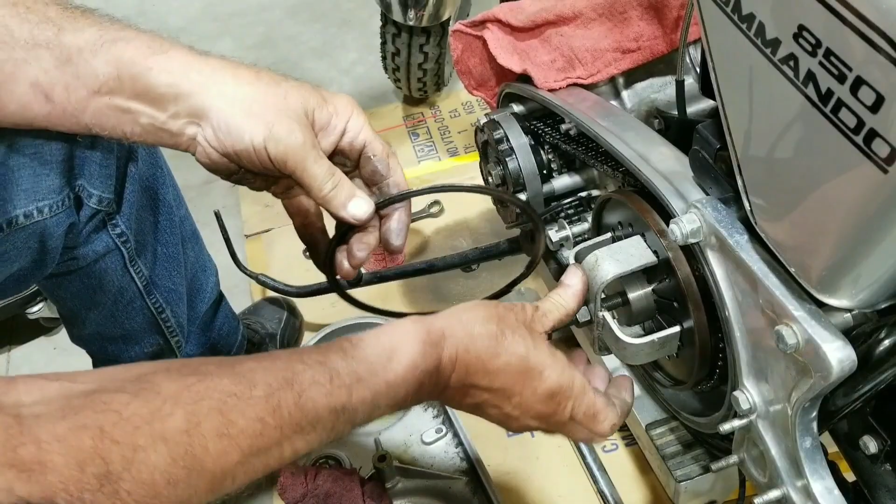Okay. It's like a giant clip. Put that in there and gently, don't spring it too far. I like to get a screwdriver and work around and make sure I'm in the notch all the way around on the hub, on the basket, because you never want it to pop out. So it has like a groove it locks into on the basket. Right. So I know I'm locked.

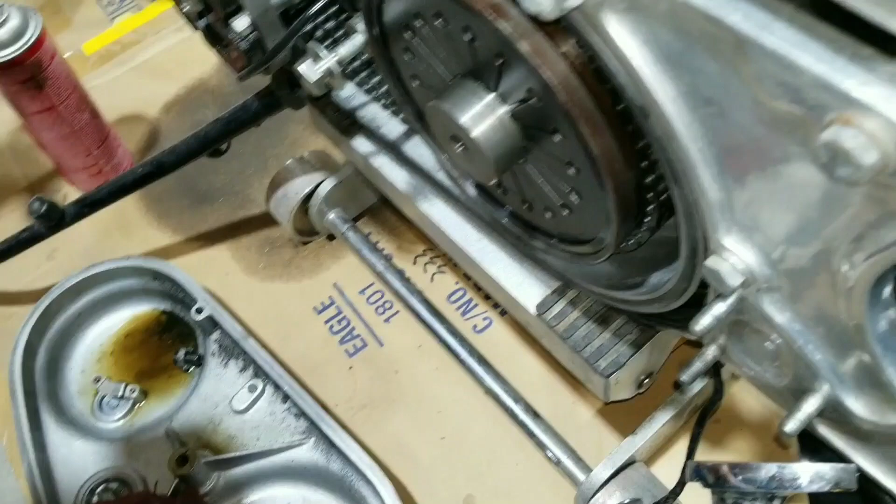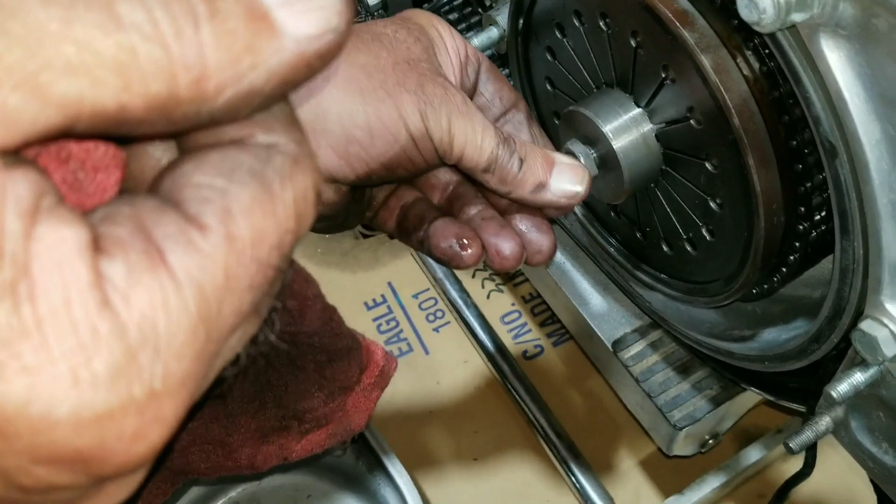So now I gotta get a wrench and take that off. Where'd you put that 3/4 inch wrench? Right there? There it is. Yeah, it's right here. Then we back this off. Take the tool out. Now we got this. The push rod was in it. Yeah. So now what we do, we gotta turn this in.

Back off this. Oh, you backed off the clutch. Yeah, it was probably set okay, but that's just the way I do it. Starting over. Yep, start over. Run it until it touches, and then just get what I call a slight snug, so you're solid against the push rod and the adjuster on the other side, and we know it works. Yep. It should be as slack as I can get. So now we're going to back it off 1/2 turn, and we're going to tighten her up. That's all there is to that.

Now we should have some play in there. Now we had it in gear, so go ahead and turn the rear wheel. We should be able to. I had it in gear. See. Oh yeah. I have the clutch out and it stops. So, yep. All right. We got it. Now we're going to clean this up and put it back together. All right.

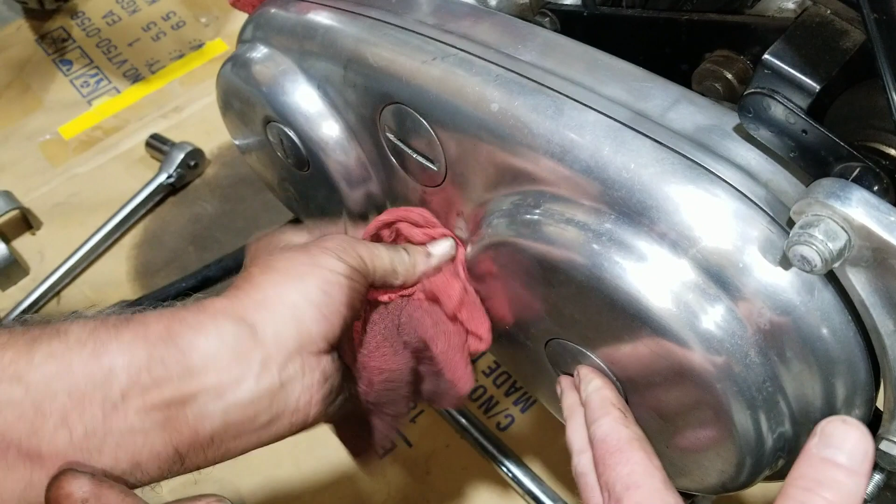There's 2 pins there. Yeah, there were 2 alignment pins. They have to line up, of course. Get all that oil out of there. I can clean that part, I guess. There's only one bolt to tighten. Here we go. Okay, we should have play back there now.

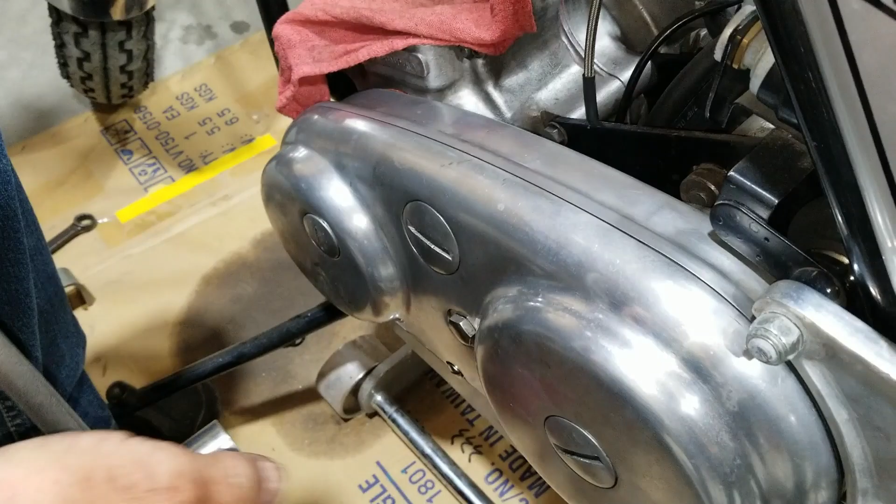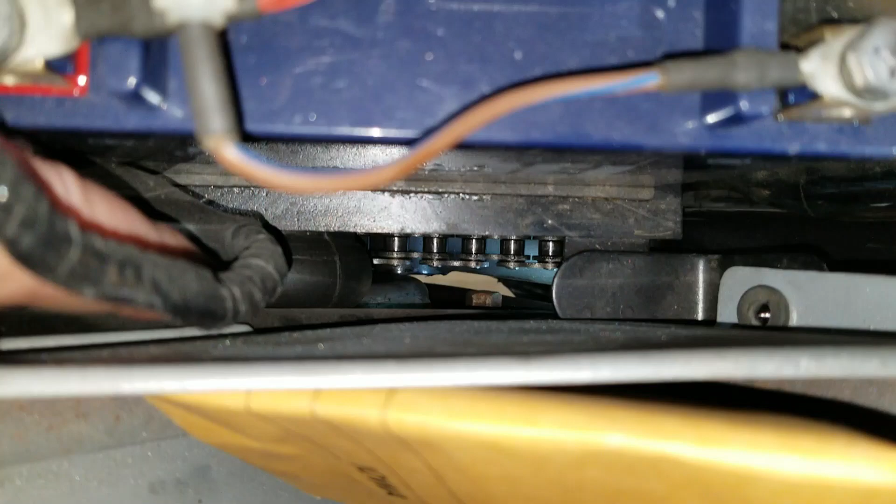Oh, yeah, we wanted to look at that. See if I can get in there and see that. We shouldn't be touching that swing arm, right? See if I can see it or not here. I'll get a flashlight. I can't really see it, I guess. Maybe I'm in a bad spot. Well, if you can see it. Let's see if we can come onto the top here. Oh, great. Oh yeah, way down there.

Let's see if I can point it out for people who don't know what they're looking at here. It's right at the end of the swing arm. A bump there. We can take this cover off here. Let's do. All right, there I zoomed in a little bit. Right there where the screwdriver's at. It's right back there. We want a gap between the primary, which is that part on the outside there. Can you point to that?

Used to rub there, and now it isn't. And then that black spot. So there's the silver spot over here, that's the primary, and then the black spot, that is the swing arm. And we want a gap between there. See how you can see the ground between there? Yeah. So we should be good.

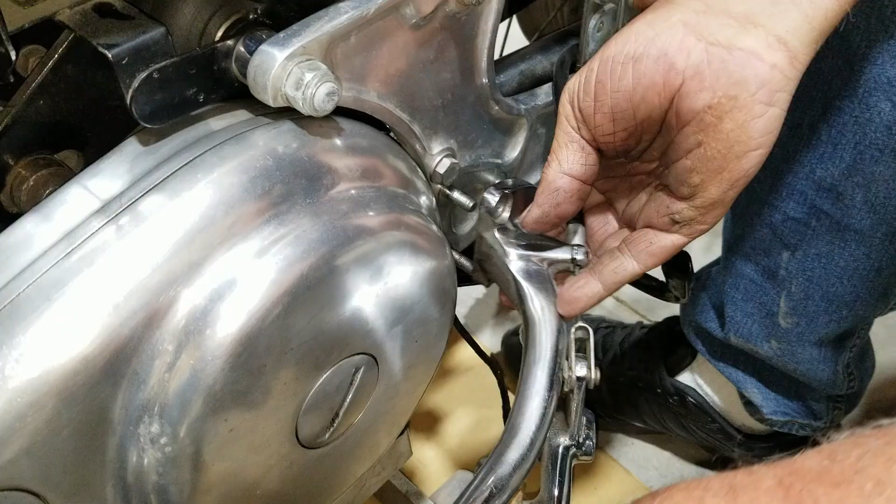All right, so now we're putting the brake pedal and footrest on now, finally. We had it on and off to do some brake stuff and locking the rear wheel, but now we're finally able to put it on and leave it on. I gotta put this down in the bottom one. Hold on there. This gotta go up here like that.

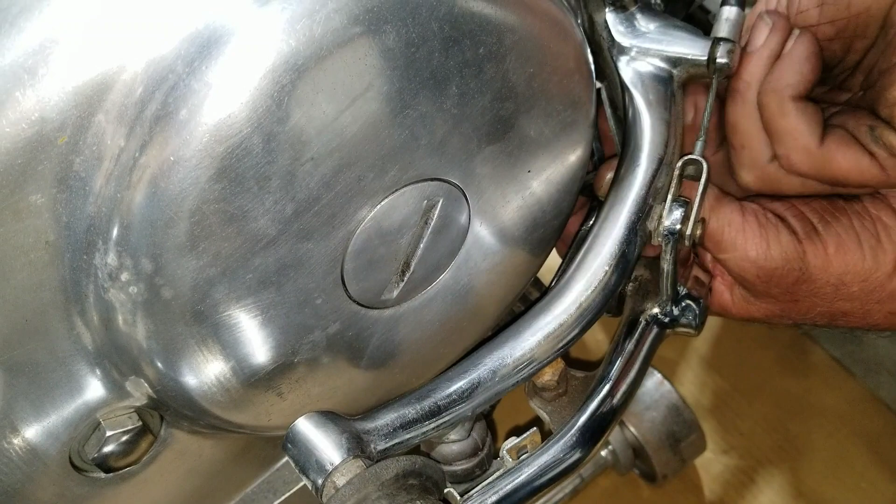Wait a minute. Our brake switch. Yeah, it's this thing. The washer goes on the back side. Found that out years ago. Or it's the wire harness thing for the brake switch, right? Yeah, it holds the brake light wire from getting caught or dragged or burned. See, it goes up like this. Tucks it in nice right in here. And it keeps it off of the swing arm and the chain guard, or the primary chain case, primary case, whatever.

See, I do it too. Yeah. Well, a lot of people use slang words, so it's like, well, whatever. I mean, we can't use proper terms all the time. So, anyway, on to tightening this down, I guess.

All right. Now you got to be careful here because sometimes you can tighten this up and it'll go like this, and the corner of this thing will start digging into these primaries. So you don't want it up that high. You want it about there. So you hold that there while you tighten that one down. You want it up out of the way, but that's all you want.

And the last one. Then we just hook up the wires. It doesn't matter which one goes where, but they kind of point to where they want to be, so that's where I put them. Oh, so they kind of fall in the right spot? Well, if they're old and used. If it's a new wiring harness, you gotta create the spot. See, it'll lay like this, so this is how I'll put it. See, there's a blade on each side of this switch. And there's one right there. There it is. There we go.

Yep. And then I guess this kind of buttons up this part of it. And then the next segment, we'll be putting the top end on this bike. Getting ready for a test run, hopefully. We'll see how that all goes together. I think we'll just end this segment here because it's kind of a whole new section of stuff. The only thing we have left to do is put oil in it. Yeah, we got to remember to put oil in this.